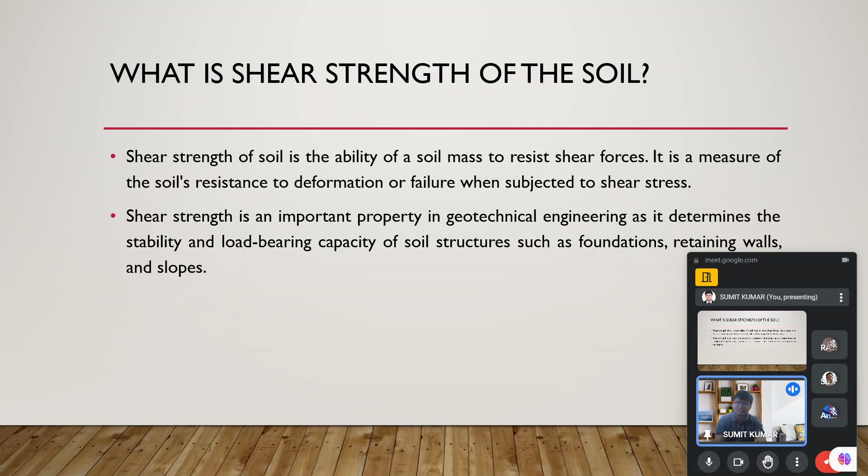So in the last session, we started with the shear strength of soil. We discussed what shear strength is, how it is important, what its significance is, and how it helps geotechnicians and civil engineers in geotechnical engineering in designing foundations as well as protecting slopes from getting damaged.

We also discussed some factors interlinked with that, which are cohesion and the angle of internal friction, the important parameters. Cohesion represents the shear strength of the soil particle due to intermolecular force of attraction, and similarly the angle of internal friction represents the resistance of soil particles. These are independent in their own way, like cohesion is an important factor in cohesive soil, while the angle of internal friction is most significant in non-cohesive soil, that is sandy soil.

But it is not always the case that we find only clay soil or only sandy soil. We always find C-phi soil, so we need to take care of this. We will discuss those points and some of the problems we face when we go to test, which we are going to discuss today only.

I am taking these points very quickly in the first 10 minutes, and afterward the new content will get started. Because there are less number of participants, I tried to utilize this time with you for revision of the last lecture. So, regarding the different types of tests, there are two primary tests we are going to discuss today, that is the direct shear test and the triaxial shear test.

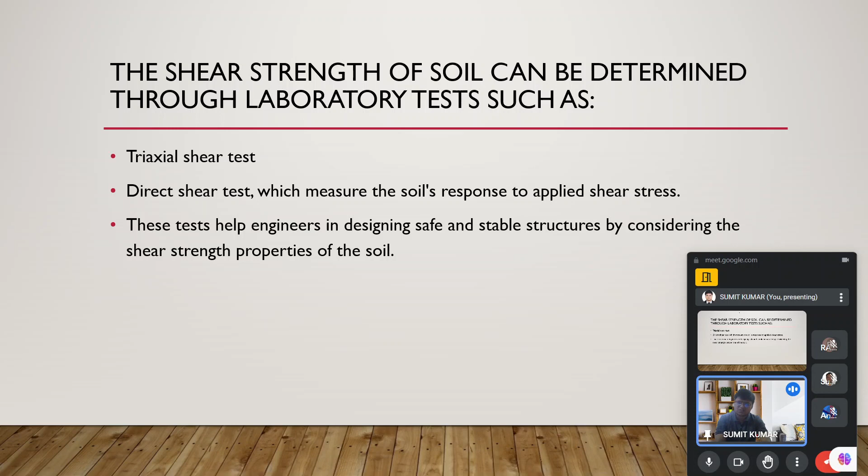And some of the small problems are also there which we are taking today, and in subsequent chapters we are taking some of the very good problems on this topic that will help you in understanding the practical implementation of these terms which we are studying right now.

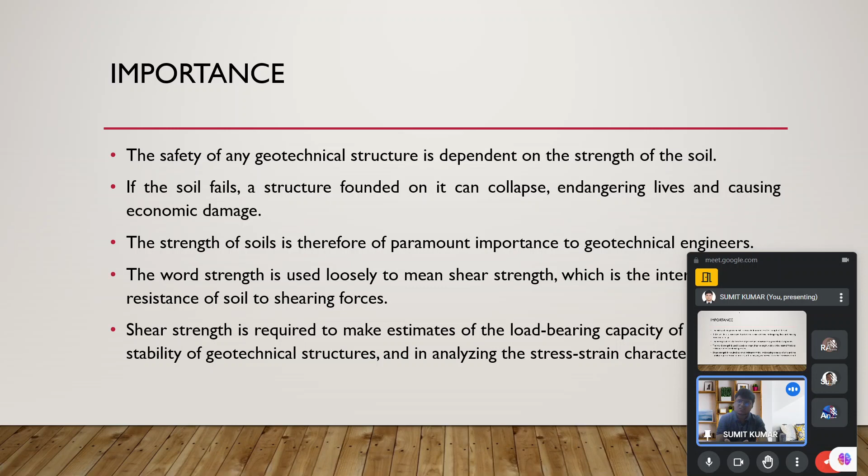Okay. So as I already said, the importance of the shear strength in geotechnical engineering is very large. So we need to be very concerned about the shear strength of soil and how it affects the characteristics of the superstructure or the substructure foundations which are situated over there.

We also see how the shear strength is relevant: the soil has some strength, and when the stress acts on it due to any other factor, suppose due to earthquake, the soil gets failed from a specific portion. So what is that specific portion? I show you some images as well in subsequent slides. These points are already discussed, so I am giving the quick revision only.

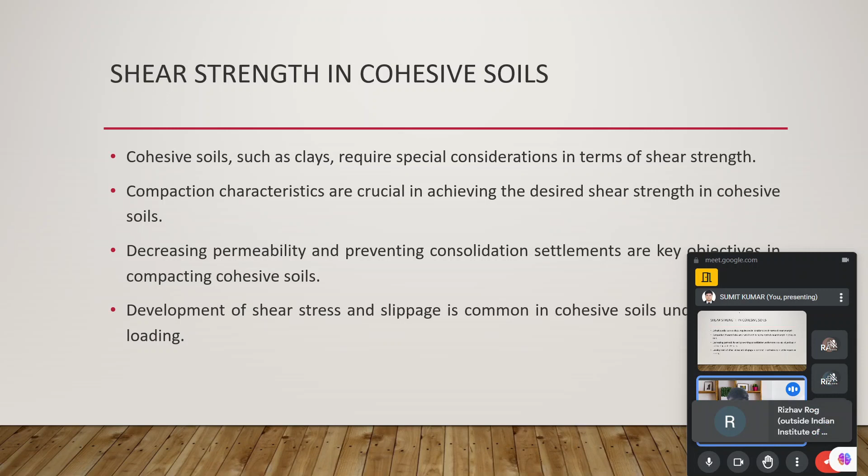Shear strength of granular soil and shear strength of cohesive soil have different considerations. As I said, the cohesion is due to intermolecular force, while in cohesionless granular soils the behavior is quite different, and it is due to the rigid boundary conditions and many more things.

So, okay. I think some of your earphones, microphones are on. So please check. Everyone keep off their microphones, so there is no noise over here.

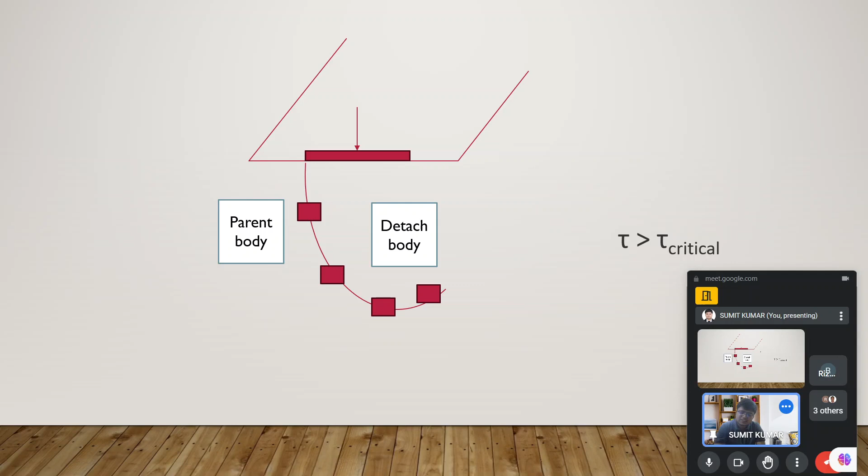Okay. So the parent body and the detached body, the two sections shown over here, the detached body gets removed, and the failure takes place from this portion only, and this condition arises only because this is the critical combination. This is the section where the stress applied is more than the strength at that section.

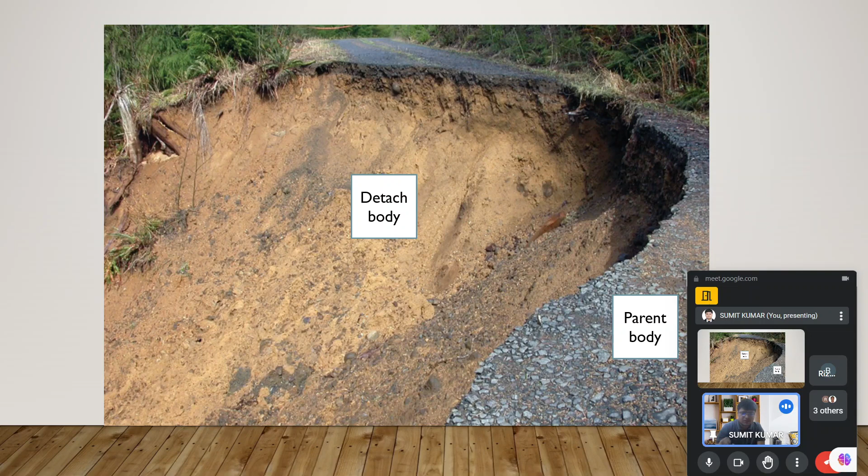Okay. So another image is also demonstrating the same. I am going very quickly because we are not discussing this today. We have already discussed this last week, but I am giving the quick revision for you.

Okay. So the triaxial state of stress: we already discussed that the stress acts at any point in three dimensions. But when we do the analysis, the 2D situation is considered irrespective of the 3D situation.

Okay, 1 minute. I have to check, someone's earphone is on, so it will be disturbing me at this point of time. Okay. Okay, I will go ahead.

So the triaxial state of stress, what I am discussing, is that the stress is acting at any point in three dimensions, not only in two dimensions. So it becomes very important that we are aware of that. We are taking consideration of two dimensions only, but the stresses are acting in three dimensions. But it is like a plane strain problem where the strain in the third dimension gets ignored.

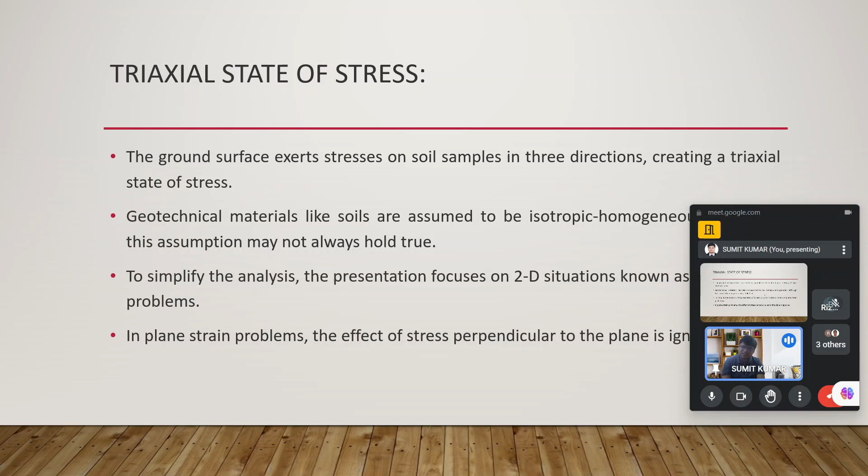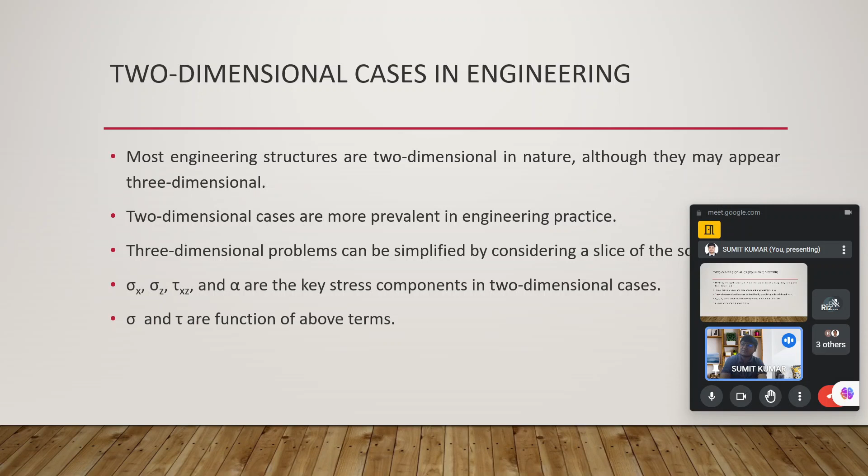Basically, it is of infinite length in a way. So we consider the two-dimensional cases in civil engineering, specifically in geotechnical engineering, and that serves the purpose for us. Okay. So we have derived some of the relations between the shear stress and the normal stress, which can be found at any specific plane which is inclined at some angle from the given state of stress.

So those are the relations which we already discussed in great detail, and we have also shown what the Mohr circle is and how it can help in finding the major principal stress and the minor principal stress. On the shear plane, what the shear stress is, and on the other plane, how we can get the normal stress and the shear stress.

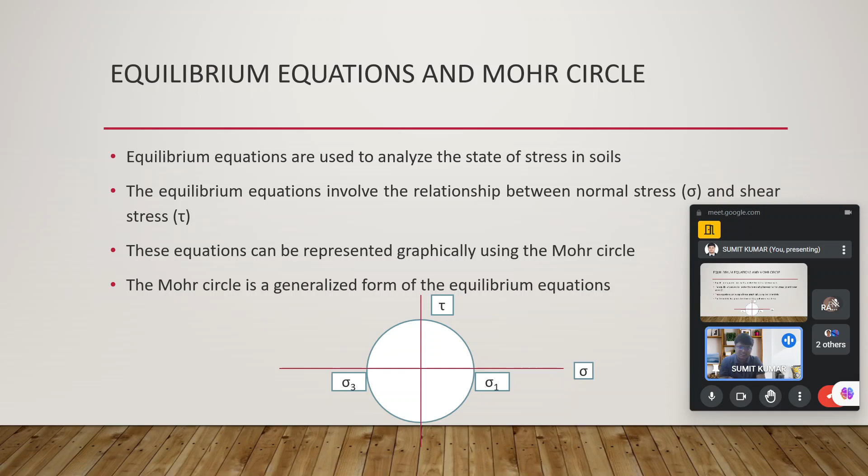Okay. So moving ahead, the Mohr circle is the most important factor, and for the Mohr circle, the properties of Mohr circles are also mentioned over here, and there is a sign convention for the Mohr circle, which is one of the important terms which need to be considered, because if you are not going to consider these things, then while solving the problem either by the analytical method or by the Mohr circle method, you get confused.

Suppose a shear stress of 20 kilonewton is acting at a specific section, you may take minus 20 instead. So the sign convention is important. You have to consider the signs significantly. Otherwise, you will get the opposite result.

And specifically, if any one of you are preparing for any competitive exam, they frame the question in that way that you'll get the wrong answer, and after the exam, you feel happy that the question is very easy. And when the result comes, you suffer, thinking what blunder I have committed.

So be aware about the sign convention in any subject, either in soil mechanics or in strength of materials. When you are taking this topic or any topic where the sign convention is there, you have to be very aware about that, because those are the points where the examiner tests whether your concept is clear or not, because it is a big mistake many students commit on several occasions, specifically in competitive exams.

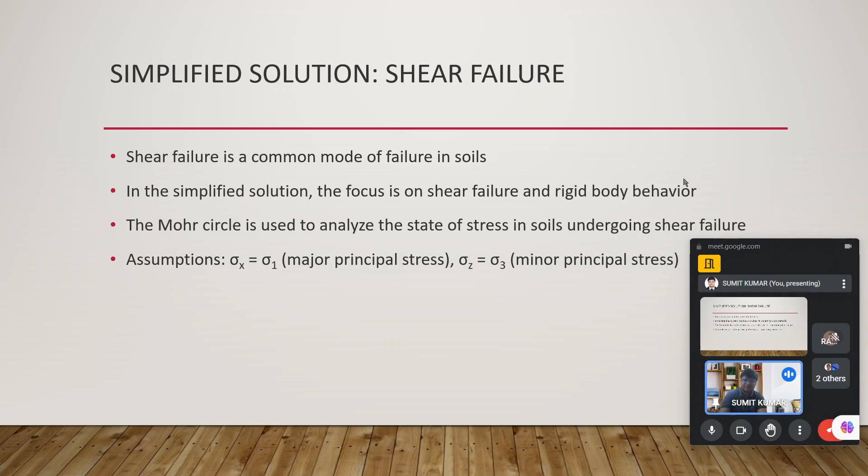Okay. So moving ahead, the general solutions: we have generalized the solutions for tau and sigma. We also have solved some of the problems. In the Mohr circle analysis, we have discussed the major principal stress and the minor principal stress, which are important terms, so that when we calculate the major principal stress and minor principal stress, we can find the stress at any angle from that plane.

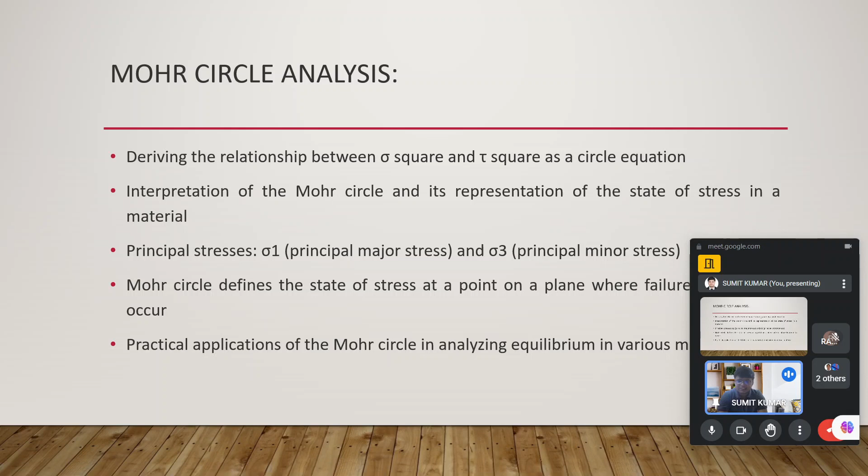Okay. Moving ahead, the Mohr circle. This is the most important circle, which I took approximately 10 or 15 minutes discussing during the last lecture. So you must be aware about that. These are some of the important points; the basic questions can be solved, and some of the advanced questions can also be solved if you understand how to obtain the center of the Mohr circle, how to obtain the major principal stress, and how to obtain the minor principal stress.

So over here, everything is pointed out: sigma 1 is the major principal stress and sigma 3 is the minor principal stress. The horizontal axis is the zero shear plane, while the radius is shown as A, and how sigma square plus tau square becomes A square. This has been taken in great detail. I think you will be very familiar with this, and I also gave you some voluntary tasks, but I think you must go through them; you will find them helpful and understand more thoroughly.

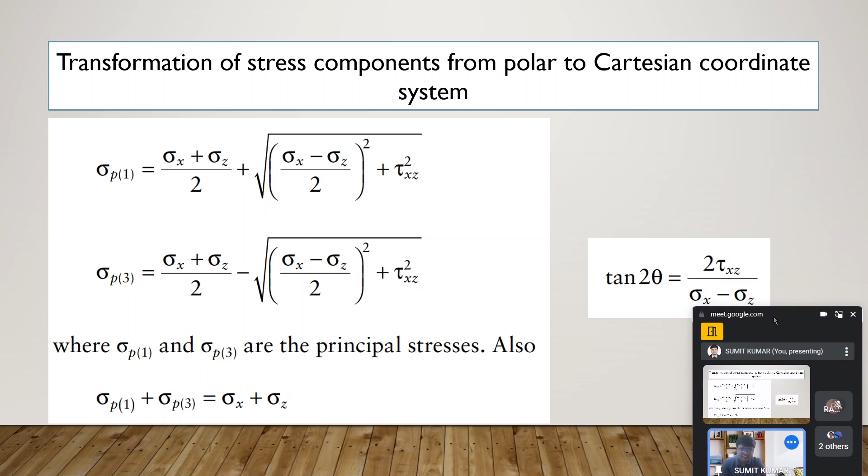Okay. So moving ahead, we have solved some of the problems. I think that was discussed in a very elaborate way, so you will understand those things. And I also told you to take your own example and solve problems like this. You will get more familiar with such problems. So I will skip this part and move ahead.

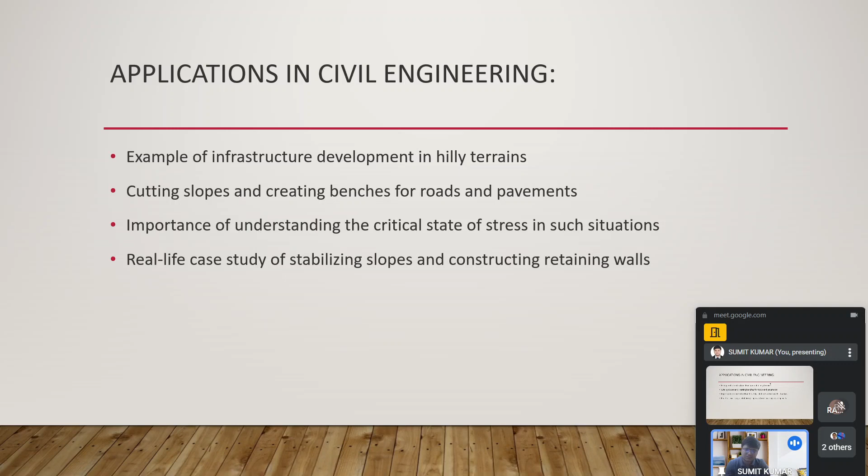Okay, and the application in civil engineering. Today also we are going to see the applications and how it will prevent damage during an earthquake. Those aspects are taken into account in today's discussion, in the PPT which is prepared for today. I'm discussing the previous PPT in a quick manner for you.

Okay. So sigma 1 and sigma 3 as sigma x and sigma z, it is already stated in the presentation over here. When sigma x is greater than sigma z, it is the passive state of the material, and when sigma x is less than sigma z, it is the active state of the material.

And how it is happening will be understood if you have a little awareness: if a certain retaining wall is moving toward the soil, the horizontal stress gets enhanced, while if the wall is moving away from the soil, the vertical stress is more. So the passive state of stress is when the wall is moving toward the soil. That is represented over here.

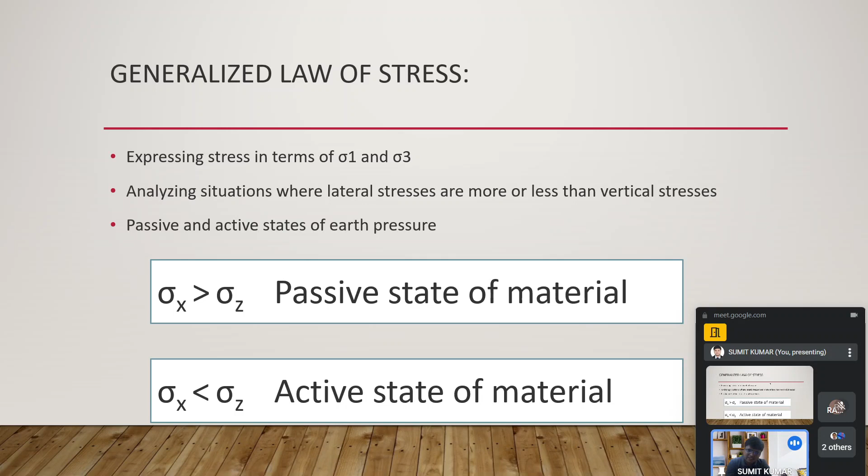That will be taken in a more elaborate way when we study the topic of active stress, passive stress, and those terms. Okay. So the pole is already discussed, and it is a very basic thing. Basically, the pole is the point on the Mohr circle through which all the planes will pass. The generalized state of stress is the interrelation between tau and sigma with sigma x and sigma z.

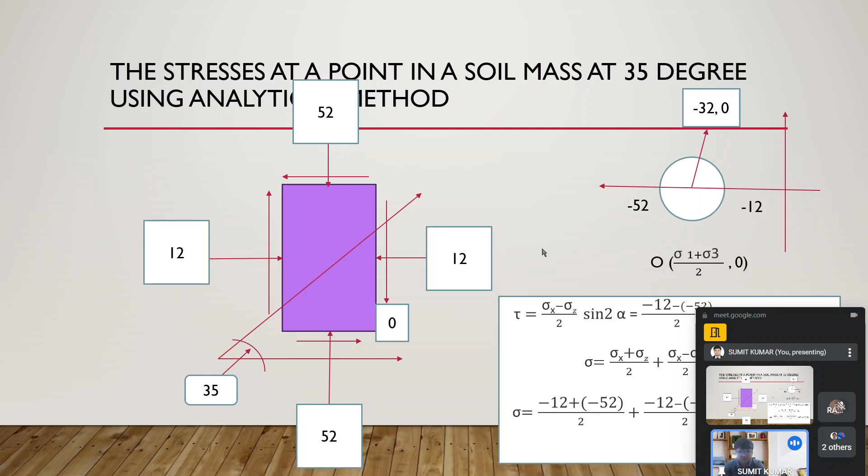And this is the question which had been discussed in the class. The question is given by sir, then the solution of that problem is shown over here. And these are some more problems which I discussed in a very elaborate way in the last video. If you were there, you must have understood. If not, you can go to the YouTube link which is provided to you and understand those things. There is no problem in that. So I will move ahead.

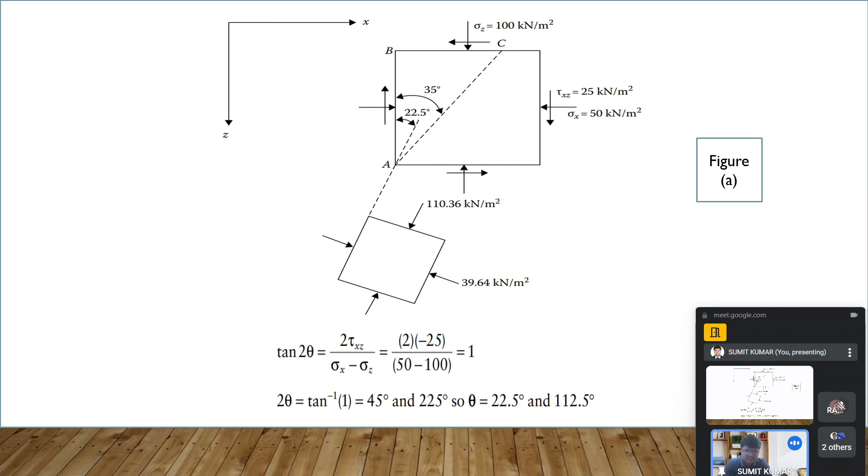I will skip this point, and I will start the new discussion which I have prepared for you. Okay. So I am going to start today's discussion, the new PPT. I think most of the people who are willing have joined. So I will start the discussion from here with the new presentation. Now I am sharing the new presentation that will contain new content which was not there earlier. I think the screen is visible. Yes, I have seen. It is visible. No problem.

Okay, so this is the content which I have prepared for you for week 2 of Geotechnical Engineering 2, where we are studying first of all the shear strength of soil. Today we primarily discuss the different types of tests for shear strength, and we will discuss the direct shear test, that is the box test, and the triaxial test in a little more detail, and we will also take some of the problems. Today the problems might be limited, but in the next class we will take some more problems that will give you an idea about the practical implementation of the theoretical terms. Okay, so we will go ahead.

So first of all, the Mohr-Coulomb failure criteria. This is the same thing where we ended in the last lecture. Here you can see that there is a relationship between the shear strength, cohesion, and angle of internal friction. Over here, you can see that the shear strength is a function of effective stress, and effective stress is one of the most significant terms which you have gone through in Geotechnical Engineering 1.

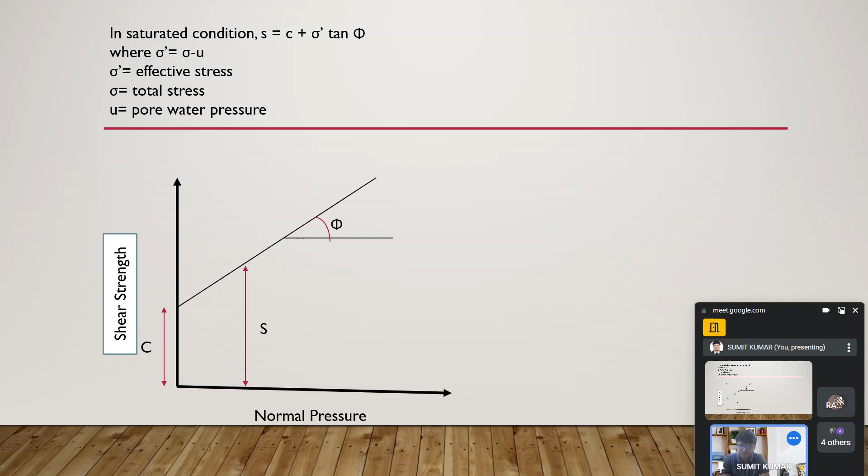Here is the term showing S equal to C plus sigma dash tan phi. Here C and phi are also the effective parameters, effective cohesion and friction parameter. So again, we start with the definition of this term, and then we will go ahead in a forward direction.

After that you will understand those terms, and I think you must be enjoying today's lecture. Okay, so first of all, what is the shear strength? The shear strength of a soil is the maximum internal resistance to applied shearing force. The shear resistance is against the shearing force only, and you must understand that the shear strength is the strength of soil. The stress which is applied above that strength results in the failure of the soil surface.

As you remind from the previous revision which I gave you today, it was also shown that when tau is greater than tau critical, the failure takes place, and the failure takes place at the critical combination where the shear strength is the minimum. Over there, the shear strength is less than the shear stress applied at that point. That critical combination will result in the failure of the soil surface.

The effective friction angle is the measure of the shear strength of soil due to friction, and this is the predominant term in cohesionless soil, as opposed to cohesive soil. While cohesion is the measure of intermolecular forces between the particles, that will be the cohesion.

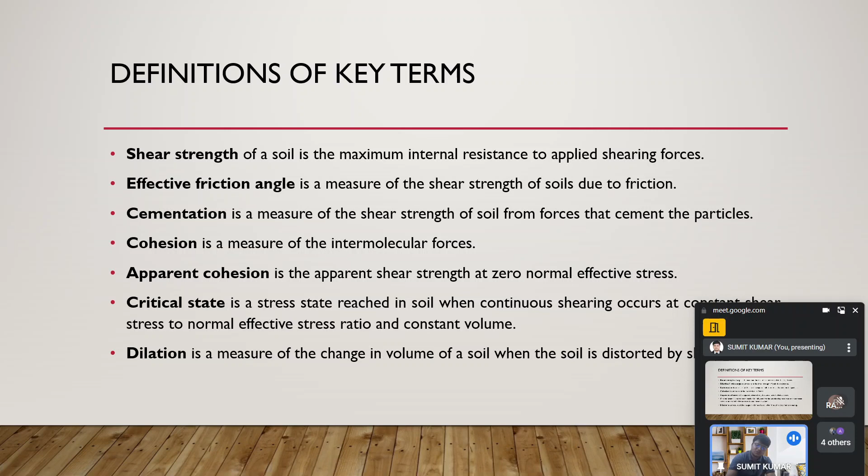Okay, going ahead, now we will again start with the shear strength definition, which we already discussed in the last class. So first of all, let's define shear strength of material. As already discussed, the shear strength is the strength of soil after which, if the stress gets enhanced to that point... if we see a practical example, suppose 20 kilonewton is the shear strength of the soil.

If 19 kilonewton is applied at that section, it will remain stable. At 19.5 it will remain stable. At 19.9 it will remain stable. At 20 it will be at the verge of failure. But when we increase from 20 to 20.1, 20.2, it will get failed. But you should understand that whenever we design any structure, we also consider the factor of safety.

Let's take a practical example in terms of numbers to see how this works. Now, regarding the shear, the detached body and parent body example, which I already showed in the earlier section of today's presentation and the previous class, you have seen how the detached body gets detached due to the critical section.

Over that section, the shear stress of the soil becomes more than the critical shear strength at that section, resulting in the failure of the soil from that portion only. So the weakest plane is basically that plane, which is one of the weakest planes. That is why the failure takes place from there only.

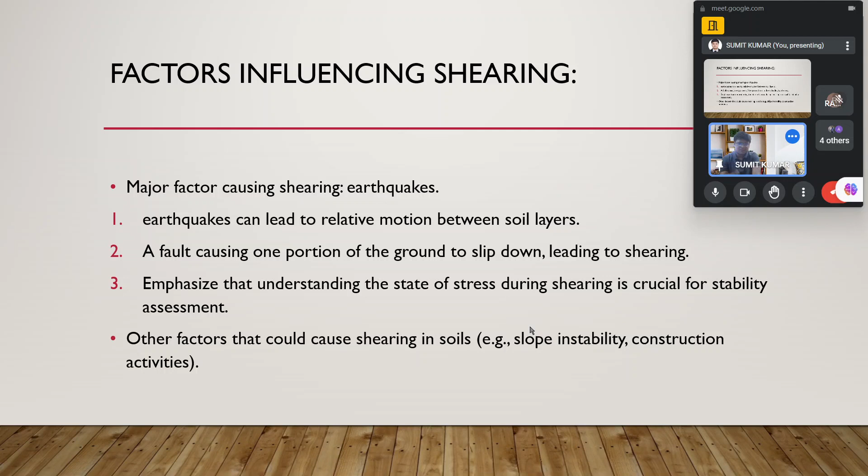So stability considerations need to be taken into account for adverse conditions, like during heavy rainfall, specifically in hilly regions, or during an earthquake. Some other factors of prime importance are slope instability, and during construction activity, some factors are there that will cause shear failures.

There are various significant applications in engineering that you come across in day-to-day practices, specifically when we consider geotechnical projects. Shear strength is one of the most important terms when we go into geotechnical engineering. Shear strength analysis helps in designing foundations, retaining walls, and slopes.

Obviously you come across this in day-to-day life and news. At some places, specifically in the rainy season, recently you have seen in Himachal or Uttarakhand, or in the mountainous and northeast regions, several landslides take place due to heavy rain, after the heavy rain.

That takes place only because the shear strength of the soil over there is not up to the mark to sustain those soil masses and those slopes in a stable condition. So it becomes very important to understand what the shear strength is, and what changes occur in the shear strength during adverse conditions like heavy rainfall or an earthquake.

So shear strength is the most important term in assessing the stability of natural or man-made structures. Both need protection from failure due to shear. So in the construction we are preparing, when we are trying to stabilize some slopes, we should be very aware that it will remain safe in adverse conditions also.

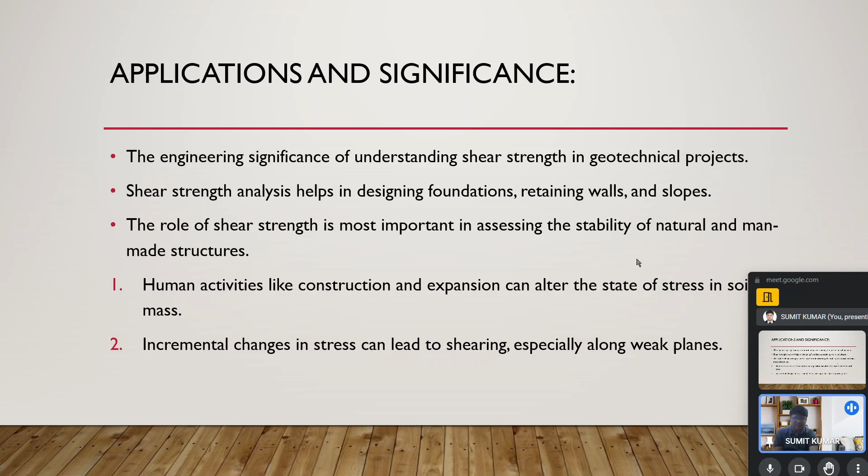Going ahead, the shear strength of soil. This is again a definition term written here for you. The shear strength of soil: the soil consists of individual particles that can slide and roll relative to one another, and how sliding and rolling is significant in the angle of internal friction was discussed in the last class.

And shear strength of soil, in the last class, you also went through the video on that topic. There is a good discussion there on the point of how rolling and sliding can cause the internal friction.

The shear strength of soil is equal to the maximum value of shear stress that can be mobilized within the soil mass without failure taking place. For example, if the soil has a strength of 20, it will sustain up to 19.9999 kilonewton, even up to 20 kilonewton. That is the critical combination. But if the stress increases beyond 20, it will result in failure.

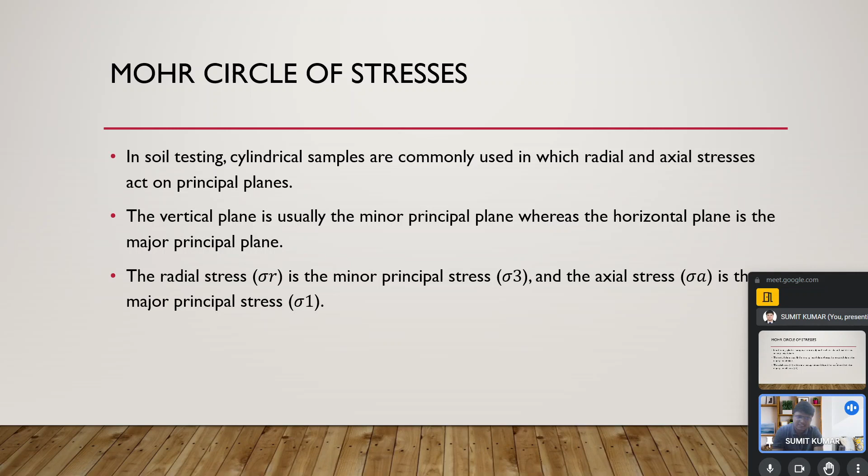Moving ahead, the Mohr-Coulomb failure criteria. First of all, we have started with the Mohr-Coulomb theory.

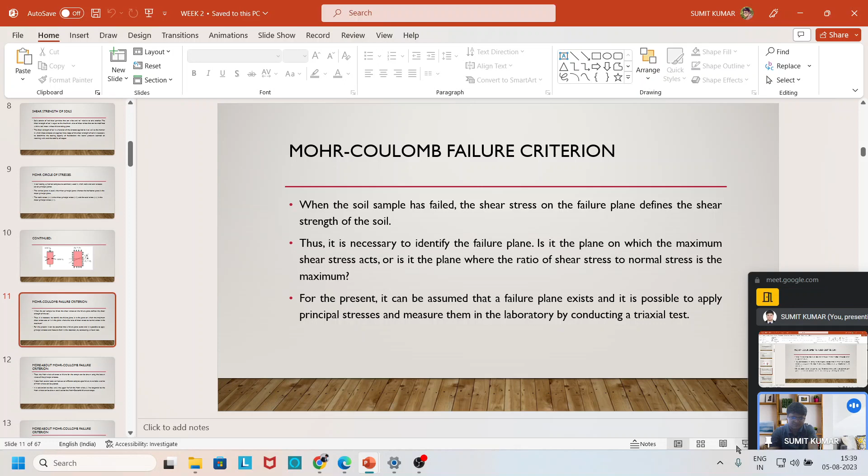We have mentioned that Mohr-Coulomb is important, one of the important aspects of how we relate the effective stress with the shear strength of the soil. So when the soil sample has failed, the shear stress on the failure plane defines the shear strength of the soil. In the field, at the failure plane from where the soil gets failed, the stress acting at that point is the shear strength of the soil at that point. So it becomes very necessary to identify the failure plane.

So the plane on which the maximum shear stress acts, or the plane where the ratio of shear stress to normal stress is maximum, is the plane where the failure gets initiated.

For this discussion, it can be assumed that the failure plane exists, as it is possible to apply the principal stresses and measure them in the laboratory by conducting the triaxial test.

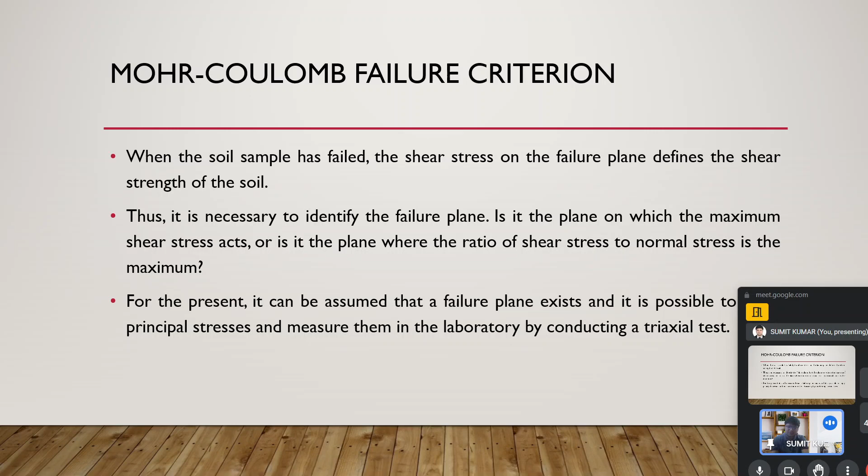Now, some more points about the Mohr-Coulomb failure criteria. The Mohr circle of stress at failure for a sample can be drawn using the known values of the principal stresses. Several tests are available, but we are discussing only two tests in elaboration, which is required for this course.

It is conventional to show only the upper half of the Mohr circle; it is not necessary to draw the whole circle. The upper half of the circle has symmetry along the horizontal axis, so the circle drawn over the upper section will be similar in the downward section as well.

And the line tangent to the Mohr circle can be drawn, and that is the Mohr-Coulomb failure envelope. The envelope formed by drawing the Mohr circle results in a straight line.

Any stress point acting below it will remain safe; up to that the strength of the soil holds. But if any point goes above that, or touches the Mohr-Coulomb failure envelope as the stress increases and the Mohr circle is drawn, the stress at that point, tau and sigma, is the critical combination where the soil gets failed.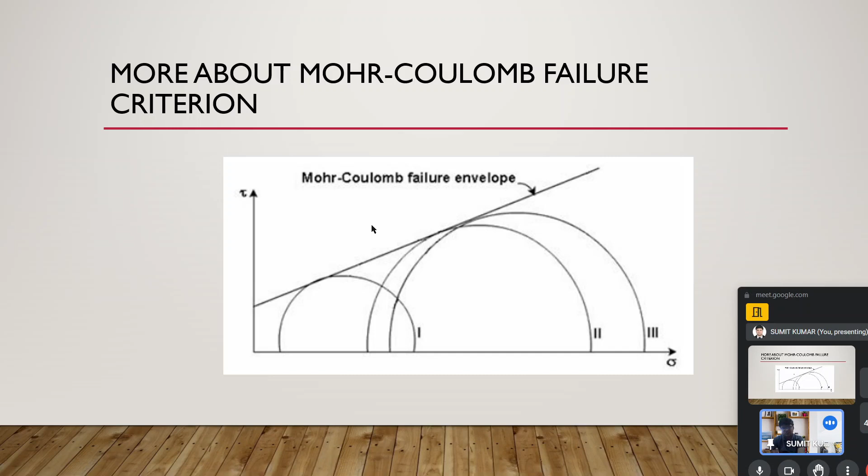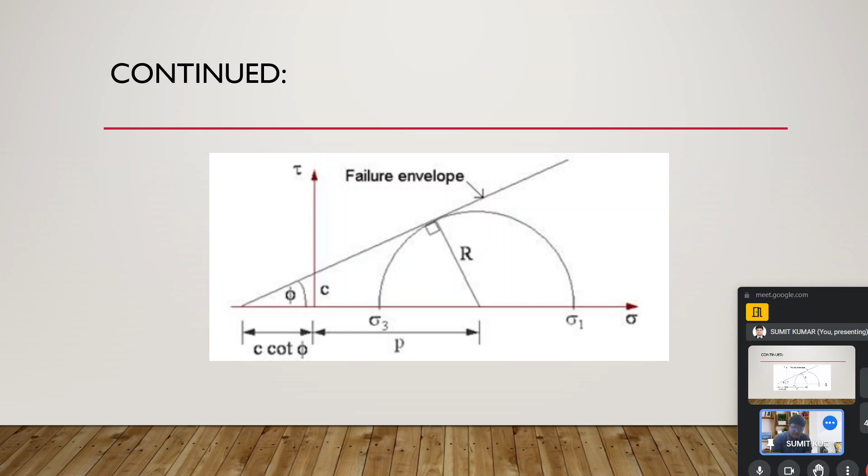Okay, moving ahead, these points are already taken. Now, some important aspects you can see from this image as compared to the previous one: when we draw a failure envelope, you will find a phi angle shown here. This phi is nothing but the angle of internal friction, and the line which cuts the y-axis at a specific point is the cohesion.

How we will find it, how it comes to us, will be elaborated. So now we will come to the different types of tests which we come across in day-to-day life for shear strength.

The most popular test is the shear box test, which is nothing but the direct shear test. The triaxial test is also most popular and gives one of the best results. Every test has some limitation, but the triaxial test is one of the predominant tests which will almost represent the true behavior of the soil. We will take these two tests in detail. Other tests are the vane shear test, torvane shear test, flat jack test, and the penetration test.

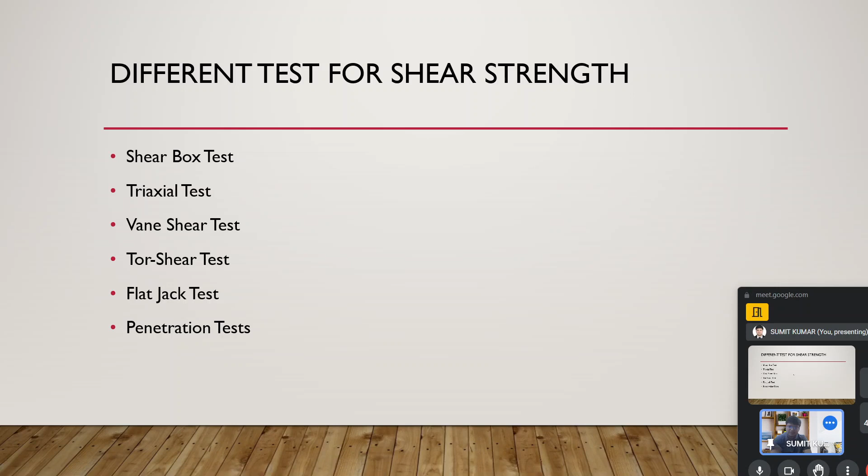So we will go through some points one by one for every test. Afterward, I will discuss the first two tests in a more elaborated way, which will be very helpful for you in my point of view. So first of all, the shear box test.

The shear box test is a 2D simulation of the soil condition, and it provides a plane stress representation of the shearing behavior. In this test, the failure plane is predefined - we know from where we are going to fail the soil. So it has several limitations as well - it will not represent the real 3D condition.

Basically, in any soil section, the stress acts from all three directions. It is a different thing - we calculate the 2D simulation, that is sigma x, sigma y, and we calculate sigma and tau for that. But the stress is acting from all three directions. When we go to the triaxial test, the stress acts in the radial direction all across, that is two directions if we consider a 3D plane, and the axial stress comes from the vertical direction, so it considers the overall aspects of the section.

Moving ahead, the triaxial test is the second test. It is a 3D description, as already explained, and it is a better replication of site conditions. Basically at site too, if we consider a specific section in the soil, the stress acting at that point is from three directions, not two. So it represents the practical implementation.

Suppose we take a hypothetical example: a specific soil section situated at x meters below the soil. At that section, the stress acting from the vertical direction will be different, but the stress acting all around in the horizontal direction, that is the radial direction, must be the same. So that condition will be implemented in the triaxial test. We will go into that, and you will see how this takes place.

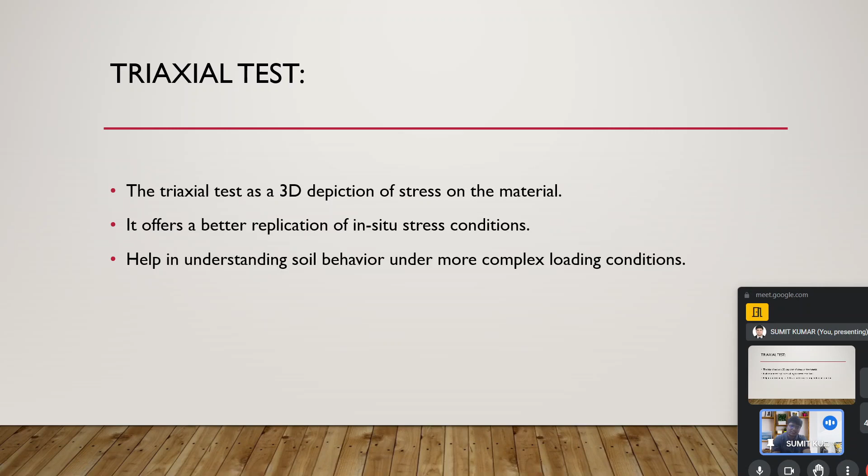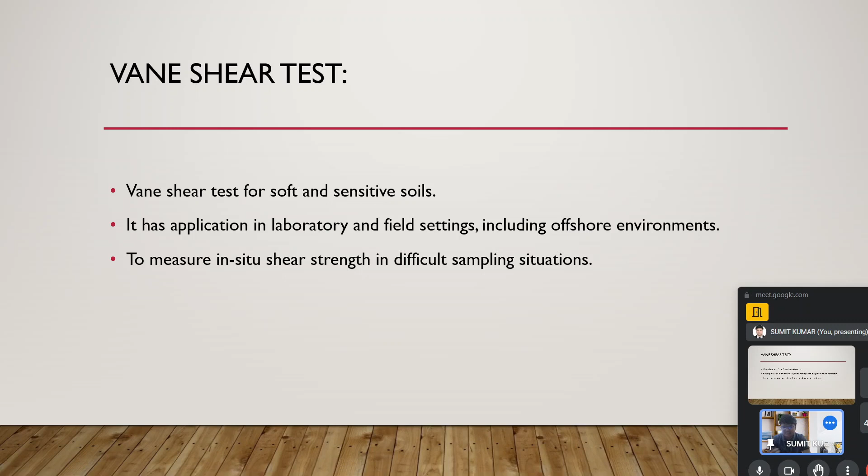Another test is the vane shear test, also one of the popular tests used in day-to-day life, mostly for soft and sensitive soil because a torque is provided to move the vane apparatus. It has applications mostly in the laboratory, but is also used in field settings. Both apparatus are available with us, and it is quite useful for testing shear strength in offshore environments. To measure in-situ shear strength, sampling the situation is difficult - taking the sample to get the strength is one of the difficult aspects of this test as well.

Another test is the torvane shear test, which is also more or less similar to the vane shear test. Moving ahead, the flat jack test is another test. Now, the last test which we use in the field to get the shear strength of the soil is the penetration test.

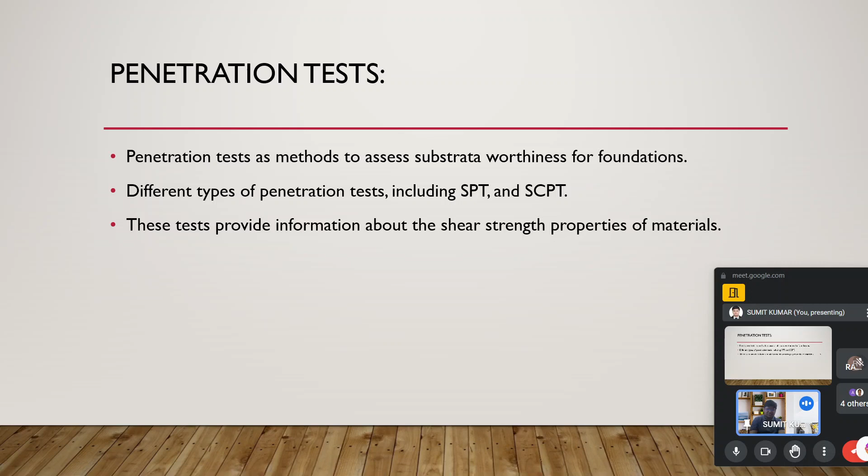In the penetration test, we try to assess the substrata of the foundation, how it will be there, what are the aspects over there. The different types of penetration test include the SPT, the static cone penetration test and the standard penetration test. Those are some of the tests which will help in understanding the behavior of soil, the strength of soil over there. And these tests provide information about the shear strength properties of the soil.

Okay. Moving ahead. As I have already told, we will be discussing these two tests in a more elaborate way, that is the direct shear test and the tri-axial test. So first of all, we will go with the direct shear test. Afterward, we will take the tri-axial test into our consideration. The direct shear test is that test in which the failure plane is already defined. We already know that the failure takes place from this section only.

But what is the significance of this test? What type of section? What type of soil will these results be valuable for, and is it more economical than other tests? Is it less time consuming than other tests? Those aspects we will be taking up over here.

Okay. So first of all, the direct shear test is carried out on a soil sample confined in a metal box. The apparatus will be shown to you in one of the images in a subsequent slide. So it is confined in a metal box of square cross section which is split horizontally at mid height. As I said, it already has the predefined failure plane. So its cross section is split horizontally at mid height, and a small clearance is maintained between the two halves of the box.

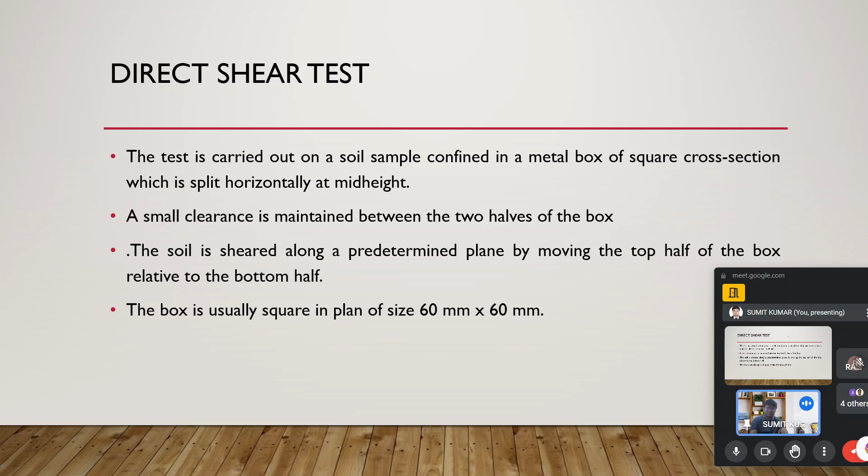The soil is sheared along the plane by moving the top half of the box relative to the bottom half, and the box is usually square in plan, 60 mm by 60 mm, but it is not a prerequisite for research purposes. Various researchers use different dimensions of the box for this test. So that is part of research. As of now, you will consider this only as square in plan. But for research, different box types are used.

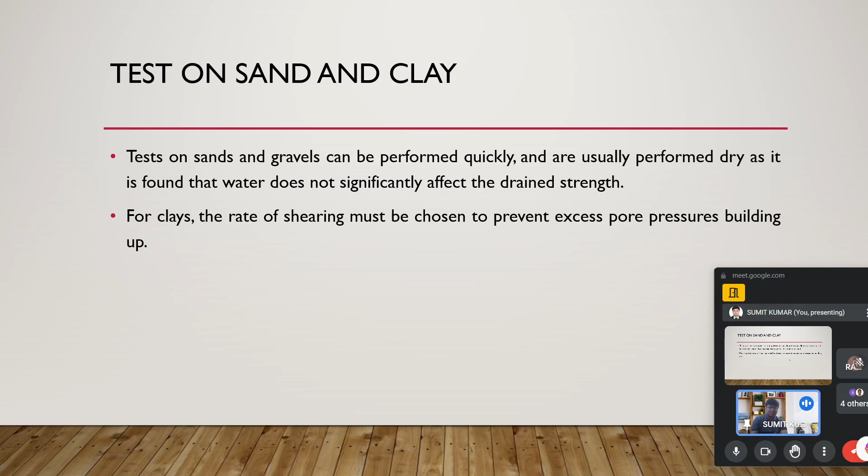Okay. Now we will consider the sand and clay for the test, how it will affect it, that is considered. Okay, so first of all, the tests on sand and gravel can be performed quickly and are usually performed dry, as it is found that water does not significantly affect the drained strength. You already know that sand and gravel have a good permeability, the water flows through them. So the tests on those are performed very quickly. While for clay, the rate of shearing must be chosen to prevent excess pore water pressure building up. So those points need to be taken into consideration.

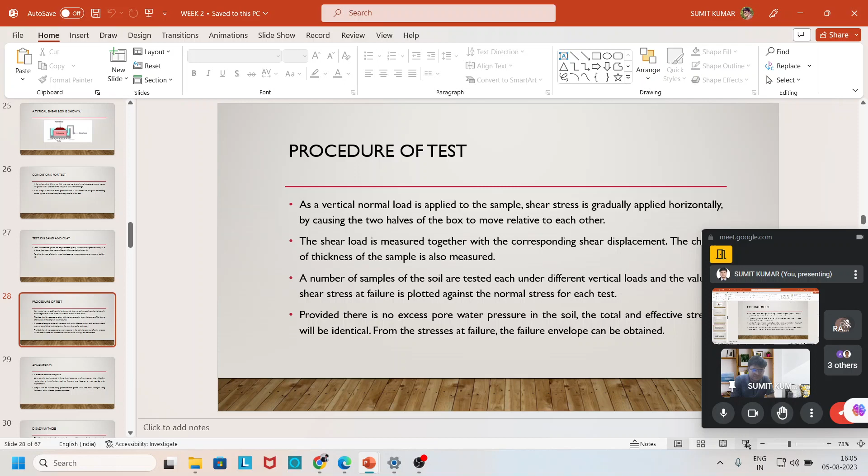Welcome back. Now we will start our discussion again after this break with the procedure of the direct shear test. So first of all, what are the steps we are going to follow during the direct shear test? We will go with that in a procedure. So as a vertical normal load is applied to the sample, the shear stress is gradually applied horizontally by causing the two halves of the box to move relative to each other.

You have seen the schematic diagram for the direct shear test. There you have seen that the two halves are there. One is the upper half and another is the lower half. And in between there is a space given, that is the predefined shear failure plane. So as the normal load increased, it gradually results in the horizontal movement, which will result in the failure of the soil over there, ultimately the movement of the box.

So the shear load is measured together with the corresponding shear displacement, and the change of the thickness of the sample is also measured. The sample thickness also gets changed because a normal load is applied at the top of the section. I will show you the schematic diagram after explaining all those points specifically, precisely.

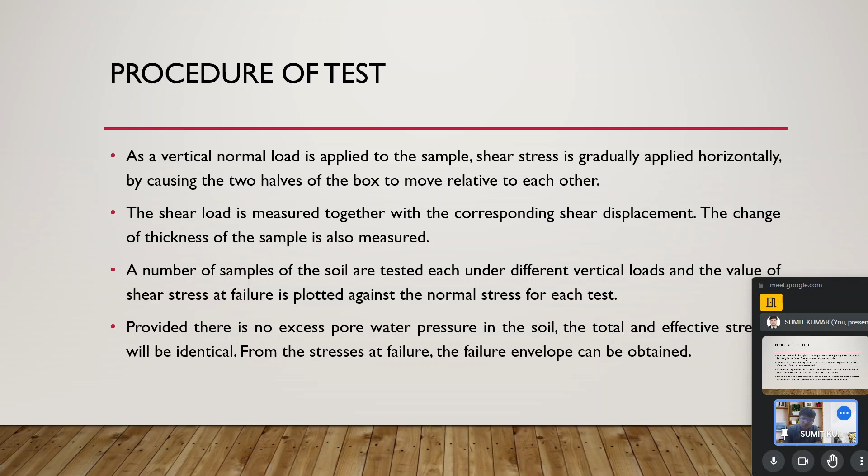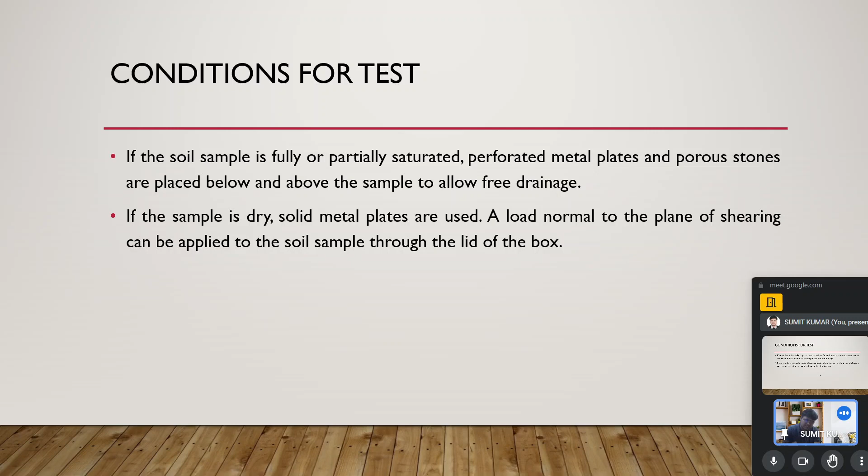Okay, what I will suggest is you must go through some of the demonstrations; that will open your mind to how it is taking place. Okay.

So now we see some of the advantages of this test. And we must understand that every test which we are performing has some advantages and must have some disadvantages as well. So first of all, this test is very easy, and it can be performed on both sand and gravels. This test is one of the very simple tests anyone can perform. No sophisticated instrument is required for performing this type of test.

Large samples can be tested in large shear boxes, and small samples can give misleading results due to imperfections such as fractures and fissures, or may not be truly representative. But that's not really the case. When we go into the research aspects, we consider different types of boxes for the testing. Otherwise, we will not consider too many things.

We will consider a specific box and test with that only, but for research purposes it becomes very important that we get a clear idea about the soil, what the shear stress is. Basically, on the basis of that we are going to state our result, and that will be used by other design engineers from your research. So that becomes crucial. So there we use different types of boxes.

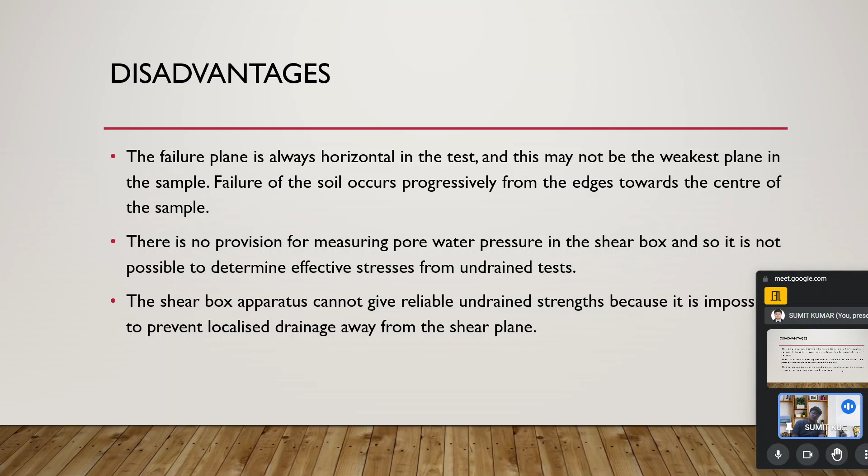The shear box apparatus is not able to give reliable undrained strength because the pore water pressure we are not able to measure.

Now we move to the next test, the triaxial test. What are the advantages we get over the direct shear test? What different aspects are we exploring will be seen. This test is more or less close to the actual condition present in the soil. So this test is quite popular, but it needs sophisticated instruments and a person with good knowledge to perform it. Otherwise, the other tests also require a technical person for implementation. This test is also sometimes time consuming, depending upon the type of soil, but the result of this test is quite promising.

Okay, so first of all, we start with the test. The triaxial test is carried out in a cell on a cylindrical soil sample having length to diameter ratio of 2, that is, length is 2 times the diameter. Normally, the apparatus of 76 into 38 and 100 into 50 is used. This is the length to dia ratio of 2:1.

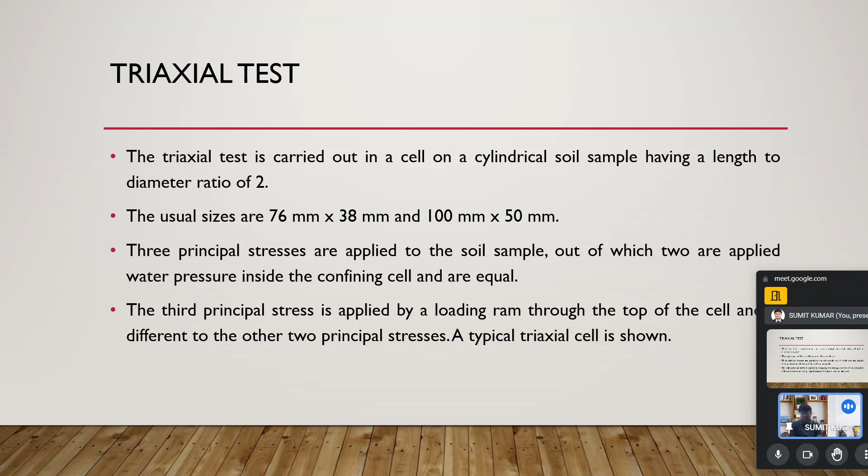So the third principal stress is applied by the loading ram through the top of the cell, and it is known as deviatoric stress, different from the other two principal stresses. A typical triaxial cell you can see in a coming slide which I am going to show. It is a schematic diagram, not the actual triaxial test apparatus.

You will come across this in the theoretical part as well, but again, I will suggest you perform this test at your institute. If you are a working professional and don't have that access, please go through some demonstrations available on different platforms by different persons. You will get the practical idea, practical implementation, of how these things work, and how this result will be helpful for us in practical knowledge.

Okay, moving ahead, the test procedure. We will go with the test procedure for this test, what process we follow, how we get the results, and the different aspects in the triaxial test. There is the UU test, CU test, and CD test. I will tell you when each is taken, we will not jump, we'll go step by step so we get a better understanding.

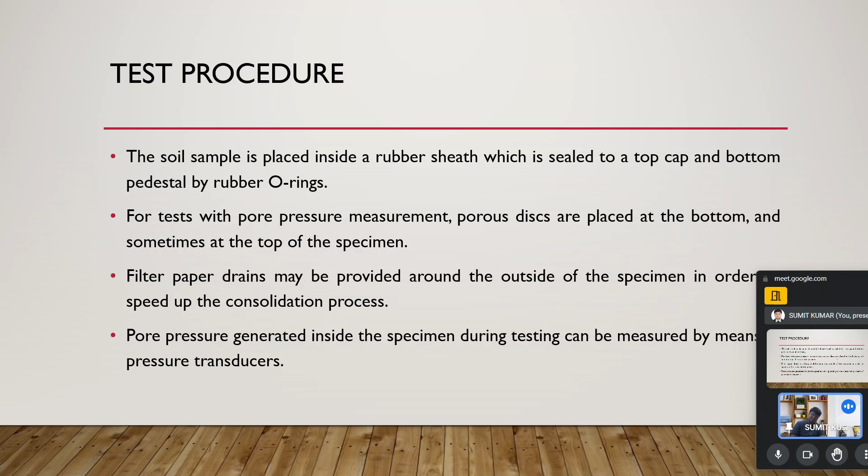Filter paper drains may be provided around the outside of the specimen in order to speed up the consolidation process, as this process could be controlled. The pore water pressure is also something we are able to manage in a triaxial test. It is also written that the pore water pressure generated inside the specimen during testing can be measured by means of pressure transducers, so we are able to measure the value of the pore pressure generated. I think you are getting my point.

Moving ahead, there are two stages in the triaxial test. So the triaxial compression test consists of two stages, the first stage and the second stage. What we are going to do in the first stage and what we are going to do in the second stage needs to be understood, and this is one of the important aspects of a triaxial test.

In this, a soil sample is set in a triaxial cell and the confining pressure is then applied. The confining pressure is applied all across, the value is the same, and it is applied mostly with the help of water.

In the second stage, additional axial stress is also applied. This additional axial stress is applied from the top, and that is also known as the deviatoric stress, which induces shear stress in the sample, since the stress all across is already acting. When you apply another stress from the top, it will result in shear between the soil sections. I think you are able to get these points, but I must suggest you see the demonstration if you are a working professional, or if you are a student and equipment is available at your institute, you must perform this test yourself.

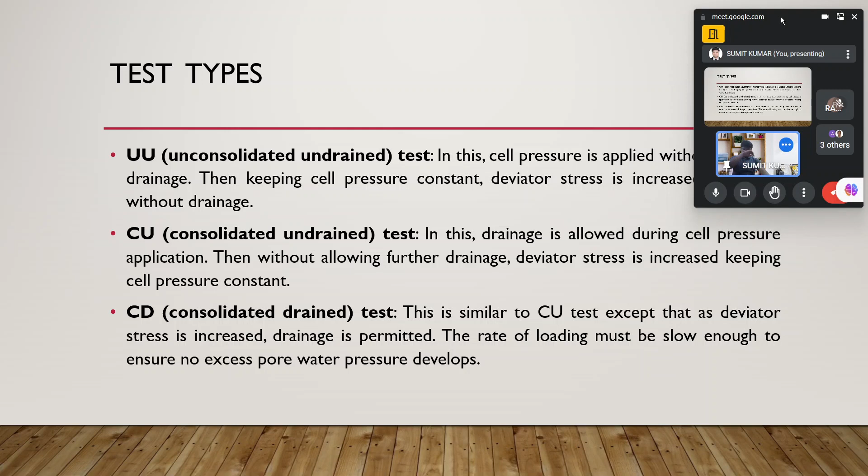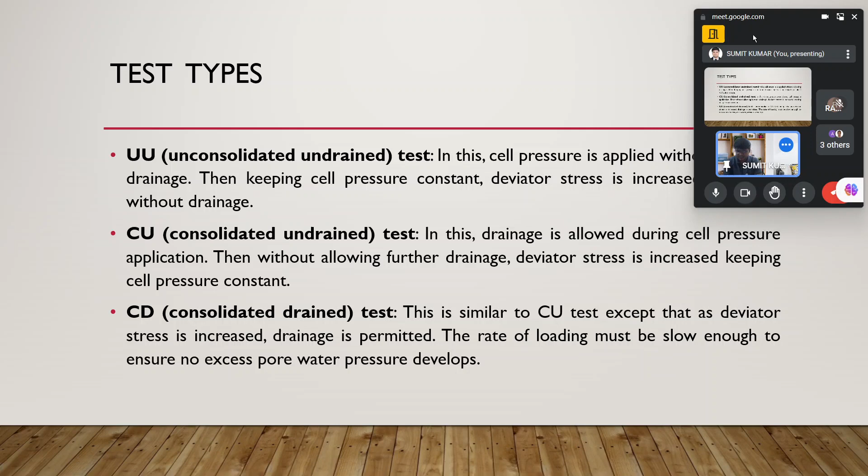Now we come to the consolidated drained test. As is clear from the name, in this case drainage is allowed in both stages, the first stage and the second stage as well. So it is similar to the consolidated undrained test, except the deviatoric stress is increased. Drainage is permitted, and the rate of loading must be slow enough to ensure no excess pore water pressure develops. We have to ensure that no excess pore water pressure gets developed. That consideration needs to be taken care of.

Now we will see the significance we get with the help of the triaxial test. The first stage simulates the in situ condition of the soil in the laboratory, and soil at different depths is subjected to different effective stresses. The consolidation will occur if the pore water pressure, which develops upon application of the confining pressure, is allowed to dissipate.

Otherwise, you should also understand that we are able to get the value of pore water pressure. As we are able to get the value of pore water pressure, we are able to get the effective stress, as effective stress is total stress minus pore water pressure. So we are able to get these things as well, which we are not able to get during the direct shear test, I think.

That is very clear. Now we will move ahead, and when we go ahead, we will see. Okay, give me a minute.

Now some more significant points: during the shearing process, the soil sample experiences axial strain. Obviously either the volume change or the development of pore water pressure occurs, and the magnitude of shear stress acting on different planes in the soil sample is different. You will come to know that the magnitude of shear stress acting at different planes in a soil sample differs for each plane.

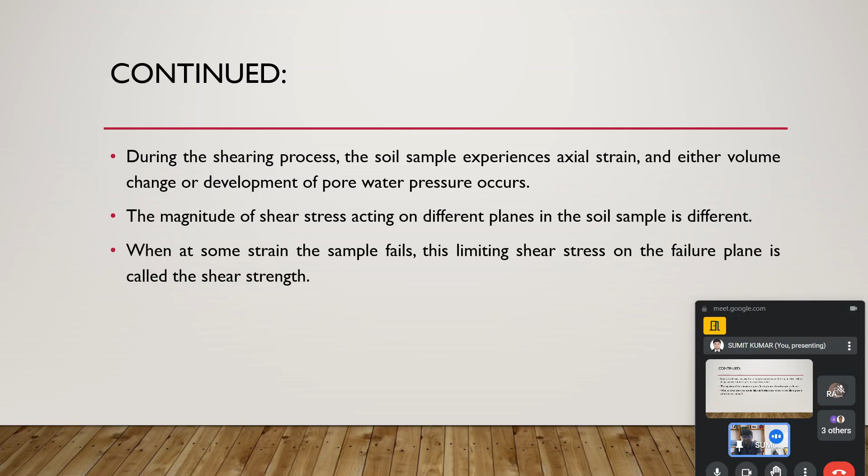Now, what are the advantages over the direct shear test? There are some of those as well.

I already said on several occasions that the triaxial test has more advantages as compared to the direct shear test. So what are those advantages? We also have to understand what advantages we are talking about.

The soil samples are subjected to uniform stress and strain. In this case, the confining pressure acts from all directions, so there is uniform stress and uniform strain. Different combinations of confining and axial stress can be applied.

I already said that we apply a sigma 3 and find the deviatoric stress. Then we again apply some other sigma 3, another confining pressure, and find sigma D, where sigma D equals sigma 1 minus sigma 3. We will take this into consideration afterwards when solving problems. Ultimately, you get the value of sigma 1, based on sigma 1 and sigma 3.

You already know the Mohr circle. So you are able to draw the various circles for different sigma 3 and different sigma 1 values, and on drawing a common tangent, you will get the failure envelope.

Drained and undrained tests can be carried out in the triaxial test. In the direct shear test, there is no facility to measure pore water pressure, so drained and undrained conditions cannot be controlled. In the triaxial test, pore water pressure can be measured in the undrained test, and the complete stress-strain behavior can be determined. There is no such limitation as present in direct shear test.

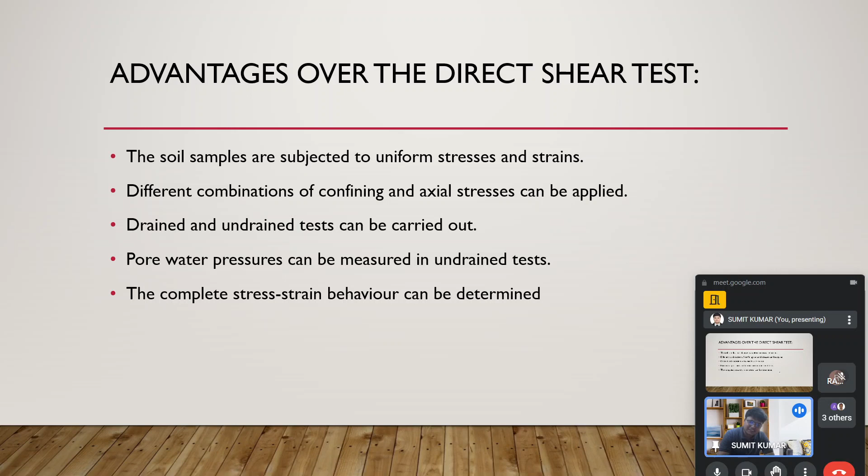When you perform this UU test, you find that all the circles have the same diameter, and when you draw a common tangent, it will be a horizontal line parallel to the horizontal axis. This represents that there is no angle with the horizontal, so the phi value is zero, and wherever the tangent cuts the y-axis, that value is nothing but the cohesion.

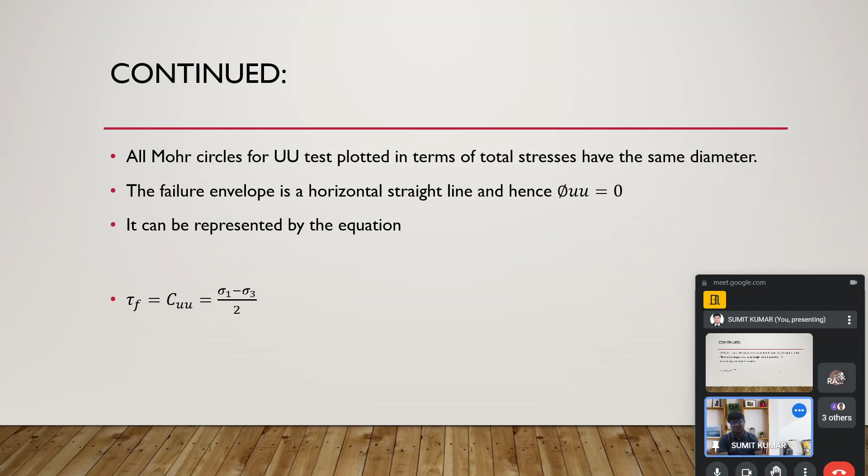The value of friction and cohesion are both found, but in both cases the value of cohesion from consolidated undrained test and consolidated drained test will be different, because in consolidated drained test the effective stress parameter we are getting, the drainage is allowed in both stages, so the value of cohesion we get in that case will be different from the consolidated undrained test.

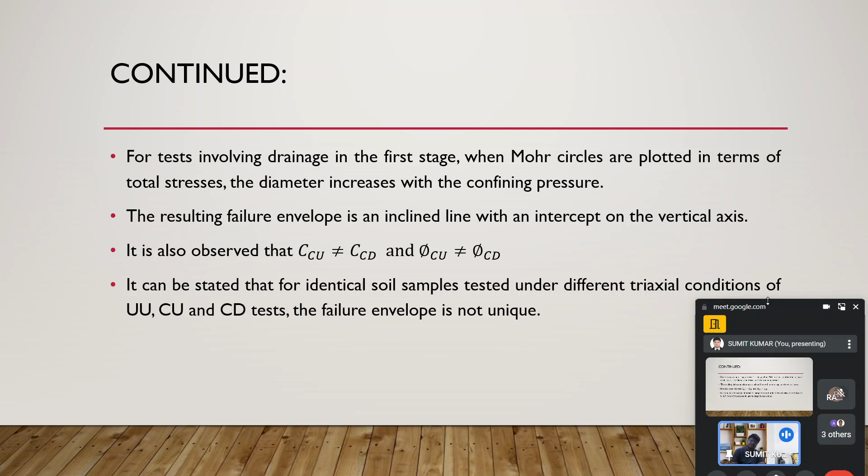Similarly, the friction value in consolidated undrained and consolidated drained tests is also not found to be the same. So it is easily stated that for identical soil samples tested under different triaxial conditions like UU, consolidated undrained, and consolidated drained test, the failure envelope is not unique, because in all three conditions we have provided different drainage considerations. In the first case, drainage is not allowed in both stages. In the second case, drainage is not allowed in the second stage, while in the third case, like the CD test, drainage is allowed in both stages.

So the value of cohesion and friction will be different, but ultimately when you go to find the value of shear strength, you will get the same result from all three cases. But there is another aspect: you cannot apply all the cases everywhere, you should look into that.

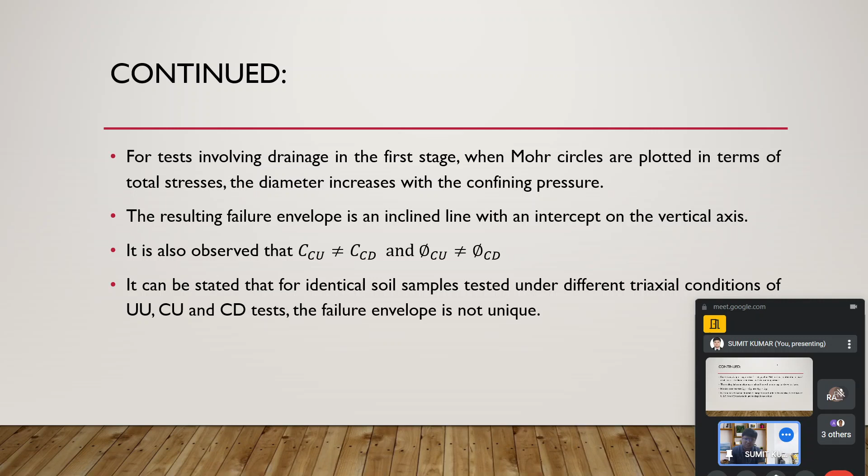Now we will move to the effective stress parameter. When the same triaxial test results of UU, CU, and CD are plotted in terms of effective stress, taking into consideration the measured pore water pressure, it is observed that all the Mohr circles at failure are tangent to the same failure envelope, indicating the shear strength parameter and the unique function of the effective stress on the failure plane. So the question arises, why does this take place?

Basically, in these cases we have considered the effective stress parameter. In the UU test, the pore water pressure is considered, and in both cases the pore water pressure is subtracted. So ultimately we are getting the effective stress parameters, c dash and phi dash. That's why the failure envelope remains common for all three cases, because the effective stress parameter is considered and it remains the same for all three cases, whereas earlier we were considering total stress, and when drainage is allowed, there we get the effective stress.

So you must understand that when we consider the effective stress parameter, the result for all three tests indicates the same failure envelope, irrespective of test type, whereas when we calculate the total stress parameter, the value will be quite different.

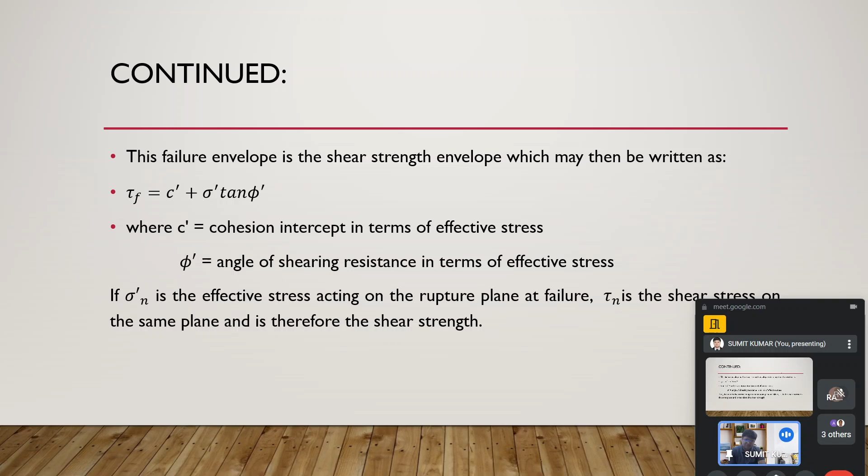Now some interrelations which I already stated, but here written again: sigma 1 dash equal to sigma 3 dash into 1 plus sin phi by 1 minus sin phi, plus 2c dash into square root of 1 plus sin phi by 1 minus sin phi. It can also be written as sigma 1 dash equal to sigma 3 dash tan square of 45 plus phi by 2, plus 2c dash tan of 45 plus phi by 2. I mistakenly forgot to write that relation earlier, but it is also there, and it is nothing but the same thing. If you are expert in trigonometry, you can solve 1 plus sin phi by 1 minus sin phi and you will get sigma 3 dash tan square 45 plus phi by 2, and that's not a problem for you, I think.

So you will be able to get those points. Similarly, 2c tan(45 + phi/2), basically that is nothing but the root under that only, so tan(45 + phi/2) only.

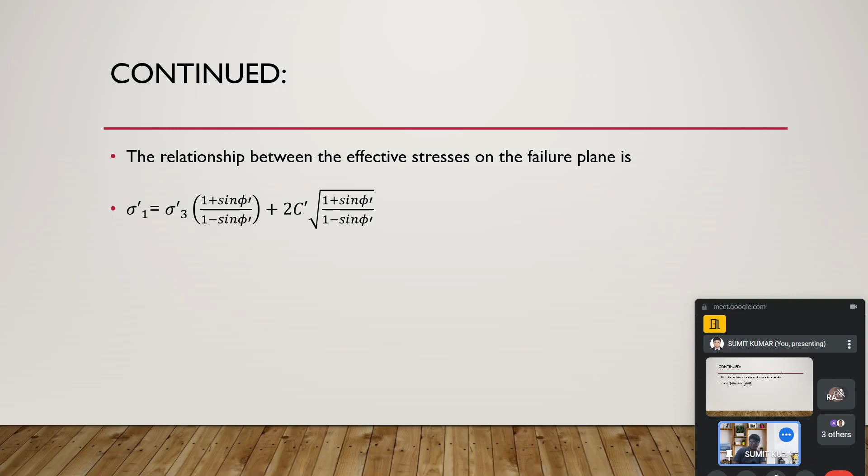Okay. Moving ahead, the pore water pressure parameter. So now we are talking about the pore water pressure parameter. Here the Skempton parameters, A and B, the two factors are there. We are going to discuss them in this section.

The pore water pressure parameter. The difference between the total and the effective stress is simply the pore water pressure u. We already know that. And the total stress and effective stress Mohr circles have the same diameter and are only separated along the sigma axis. In total stress, the value of sigma will be different; this happens due to the magnitude of pore water pressure.

So it is easy to construct a series of total stress Mohr circles, but inferred total stress parameters have no relevance to the actual soil behavior. And in principle, the effective shear strength parameters are necessary to check the stability against failure for any soil construction in the field.

And to do this, the pore water pressure in the ground under the changed loading condition must be known, and in general they are not. So the pore water pressure parameter becomes one of the important terms. With the help of this, we will come to know the total pore water pressure generated during the process.

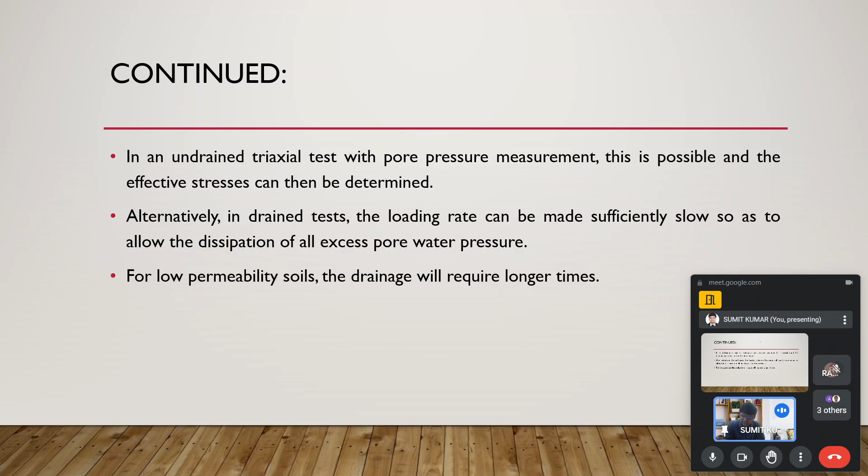Moving ahead, in an undrained test, the general expression relating the total pore water pressure developing and the change in applied stress for both stages is delta u = delta u1 + delta u2. Now delta u1 is the change during stage 1 while delta u2 is during stage 2. So how will we calculate? It is nothing but B into delta sigma 3 plus A into delta (sigma 1 minus sigma 3).

Now I will tell you another aspect: when we transform this function it becomes B into delta sigma 3 plus A into (delta sigma 1 minus delta sigma 3). Here delta u1 is the pore water pressure developed at the first stage, during the application of confining stress. Basically, to calculate B, it relates to delta sigma 3, the change in pressure during the confining stage.

While delta u2 is the pore water pressure developed during the second stage, when the stress is delta sigma 1 minus delta sigma 3. And these B and A are the Skempton pore water pressure parameters. So it becomes one of the important terms and sometimes problems are also asked from here.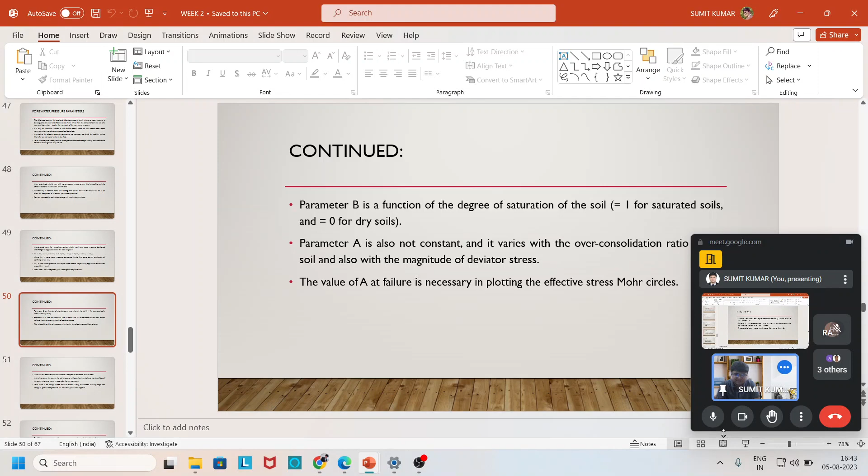And the parameter B, which depends on the confining stage, is one of the terms whose value remains one for saturated soil and zero for dry soil. Similarly, the parameter A is also not constant; it varies with the overconsolidation ratio. Now, the question arises, what is the overconsolidation ratio? You must be aware of that, but if not, I will explain this term to you.

It is the ratio of the stress applied in the past to the stress applied in the present. So the parameter A does not remain constant. It varies with the overconsolidation ratio of the soil, and also varies with the magnitude of the deviator stress.

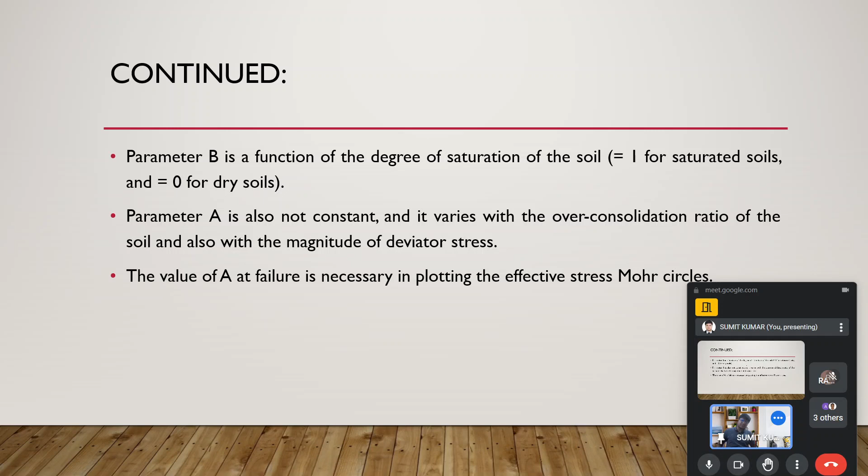The value of Skempton's pore pressure parameter A at failure is necessary in plotting the effective stress Mohr circle.

Moving ahead, when we consider the behavior of a saturated soil sample in the undrained triaxial test, in the first stage, the increase in the cell pressure without allowing drainage has the effect of increasing the pore pressure by the same amount. Specifically during the undrained test, when water is not allowed to move in a saturated soil sample, in the first stage when cell pressure is increased and water is not allowed to flow out, the pore water pressure gets increased by the same amount because there is no drainage facility available.

So all the pressure which is generated is transformed into pore water pressure only, and no change in the effective stress takes place, because all the change transforms into pore water pressure, so effective stress remains the same. During the second shearing stage, the change in the pore water pressure can be either positive or negative because of the drainage condition.

Now, for the UU test on saturated soil, the pore water pressure is not dissipated in both the stages, so delta U is equal to delta U1 plus delta U2. Because in the UU test in both the stages the valve remains closed, no water dissipation is allowed, and volume remains constant.

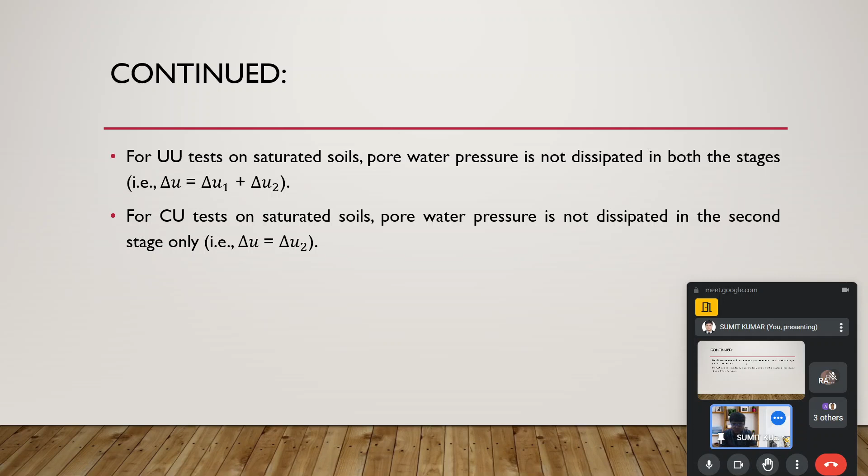Similarly, for the CU test on saturated soil, the pore water pressure is not dissipated in the second stage. So delta U is nothing but delta U2 only, because the water is not allowed to move out during the second stage. In the first stage the water gets dissipated, since water is allowed to move out, so there is no pore water pressure there. That's why the value of pore water pressure is only delta U2, not delta U1, for the CU test.

Moving ahead, now the stress-strain behavior of sand. Sand is usually sheared under the drained condition. We know about the void ratio, volume of voids by volume of solids, which is an important aspect in cohesive soil. But in cohesionless soil, relative density becomes the most important term. On the basis of relative density, we can say which soil is loose or dense, because it relates the maximum and minimum void ratio along with the void ratio in the given condition.

So sands are usually sheared under the drained condition as they have relatively higher permeability. This behavior can be investigated in the direct shear or the triaxial test. The two most important parameters governing their behavior are relative density and the magnitude of effective stress. Relative density is equal to Emax minus E by Emax minus Emin.

You must understand that the value of Emax is 0.91 while Emin is 0.35. Normally we will remember this, but it is not always that the values of Emax and Emin will be these only. For any examination purpose, they will be given. Here E is the void ratio in the present, current situation.

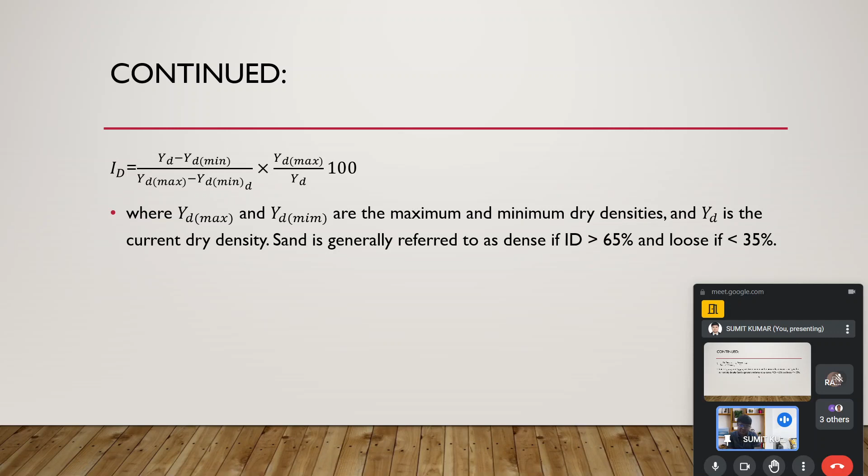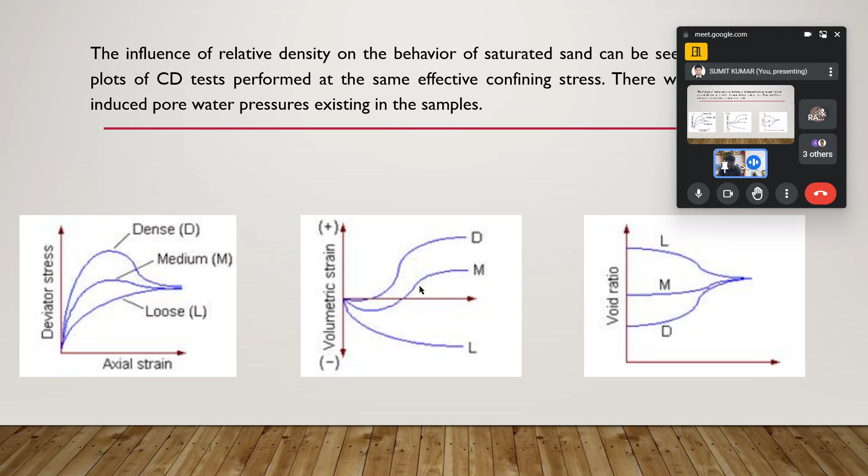So, irrespective of their initial density, all reach the same ultimate condition, and the denser sample attains a higher peak angle of shearing resistance in between. Initially dense samples expand or dilate when sheared, and initially loose samples compress. So, this is the term.

Now we will solve some small problems before ending today's session. So, let's look into the problem. The first problem is that a UU test is carried out on a saturated normally consolidated clay sample at a confining pressure of 3 kg per cm square. This 3 kg per cm square is nothing but sigma 3, the confining pressure acting all around.

The deviatoric stress at failure is 1 kg per cm square. The deviatoric stress is the stress applied from the axial direction. So you have to find the total stress strength parameters, and the other question is, if another identical sample is tested at a confining pressure of 4, meaning sigma 3 changes to 4 kg per cm square, what will be the vertical axial stress at failure? So we will solve this problem here.

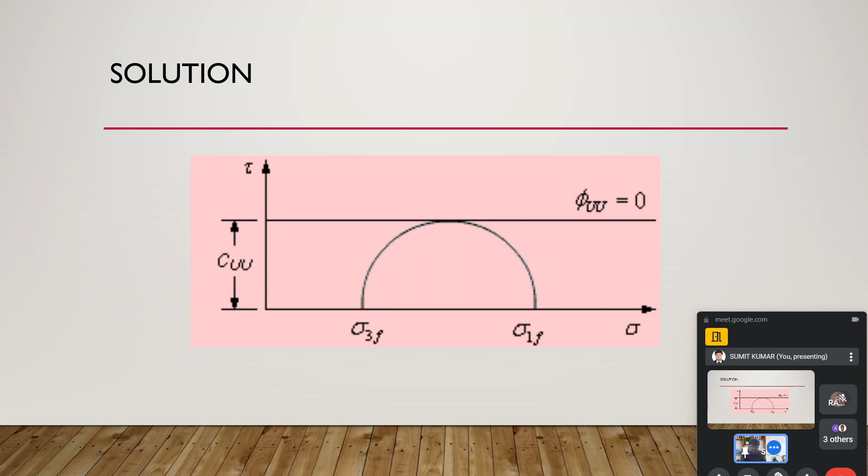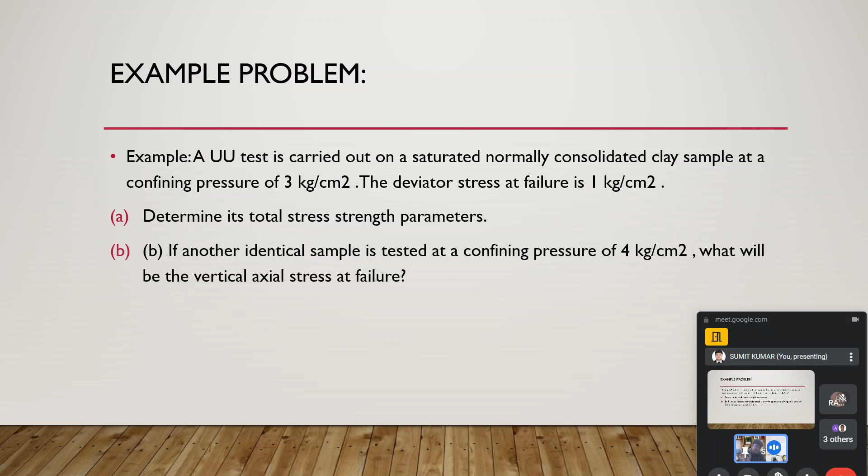So first of all, a graph is plotted as it is a UU test; we already saw the graph is plotted this way. Now sigma 3 is 3 kg per cm square and sigma d is 1 kg per cm square, and the deviatoric stress is nothing but sigma 1 minus sigma 3. So sigma 1 minus sigma 3 is 1 kg per cm square, and from the plot you see that phi uu is equal to 0. So C uu is equal to sigma 1 minus sigma 3 by 2, that is 0.5 kg per cm square.

Similarly, try to find the second part of the problem where sigma 3f equals 4, and you test an identical sample, and the failure is performed. So sigma 1 minus sigma 3f at all the confining pressure. Therefore, the vertical axial stress at failure becomes sigma 1f equal to sigma 3 plus deviatoric stress. So the value becomes sigma 1f equal to 5 kg per cm square.

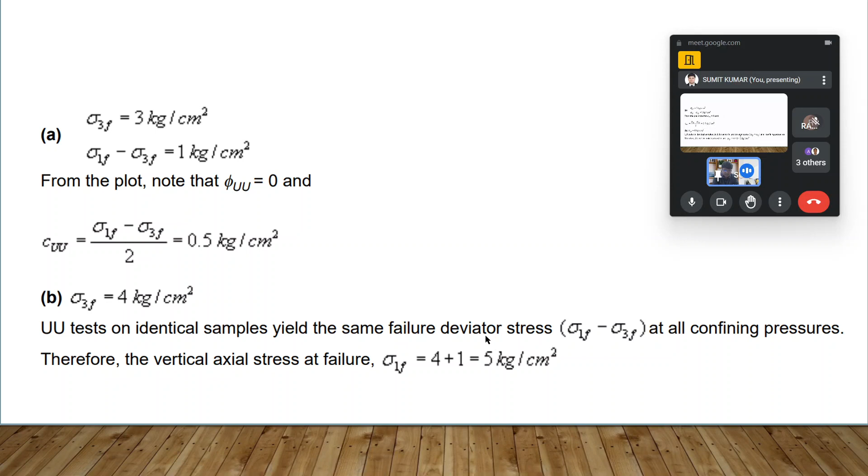Moving to the second problem, here also the confining pressure is given, the axial stress at failure is given, that is the deviatoric stress is given, and the pore water pressure failure parameter is also given. In this case also we have to find the value. So for this problem, sigma 3 dash equals sigma 3 minus u f, because we are considering effective stress parameters.

So sigma 3 value is 4.8, and the pore water pressure developed for sample 1 is 3.8, so sigma 3 dash is 1 while sigma 1 dash is 3. Similarly, from that table, for sample 2 also we get the effective stress parameters. After plotting the points 1,3 and 1.5,4.5, we get this graph, and on that basis the value of cohesion remains 0, while when we measure this angle we get the value of phi as 30 degrees.

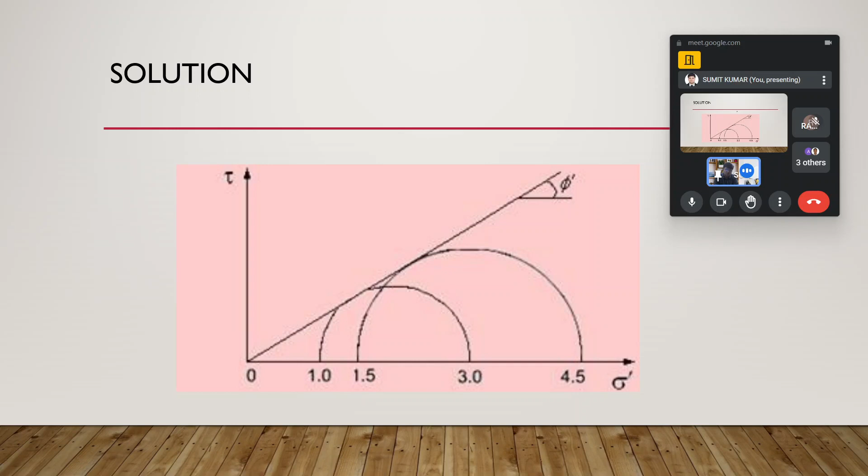We can also find this value with the help of the empirical relation: sigma 1 equal to sigma 3 times (1 plus sin phi) by (1 minus sin phi), plus 2c times root under (1 plus sin phi) by (1 minus sin phi). From that relation also we can get the result, but here some of the data is not present, so from this data we have to get the answer with the help of this type of plot only. Today I haven't taken more problems, for your convenience.

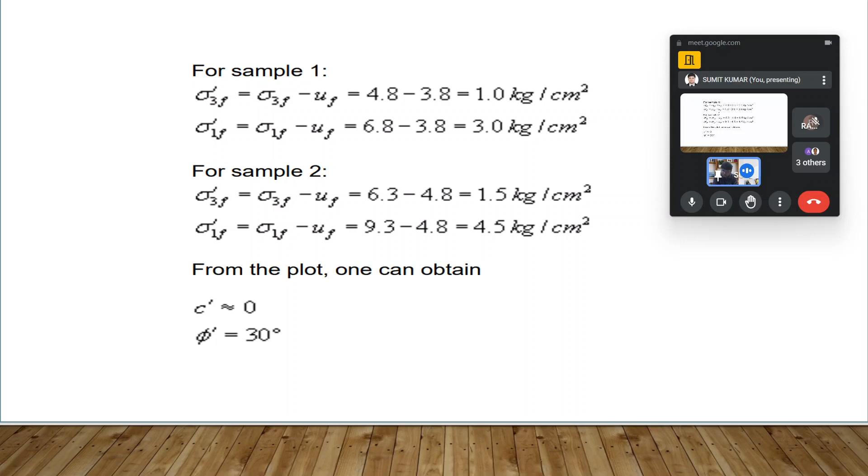From the next class, I will take more problems that will represent the practical implementation of whatever we are studying right now. So moving ahead, now we will discuss.

Now I will suggest what we discussed today: we understood the direct shear test, its procedure, advantages, disadvantages, and the problems with it, such as the drainage condition we are not able to maintain, and we are not able to calculate the pore water pressure. So whether in the drained or undrained condition, what result there is, we are not able to understand. So those aspects are there.

Another thing we understood is that we studied the triaxial test as well. Now, some work I suggest you do at home that will help you in understanding these things.

We understood what is shear strength, when shear strength takes place. So try to write some points on what shear strength is, how shear strength affects the soil, and in what important places we have seen it, such as in foundation design, slope stability, and retaining walls, where shear strength becomes one of the more important parameters.

Similarly, I also suggest you write the procedure which we already discussed, and see the demonstration or perform the demonstration yourself. On the basis of that, write the procedure in your own language. It will enhance your thinking capability and understanding about the practical test stage.